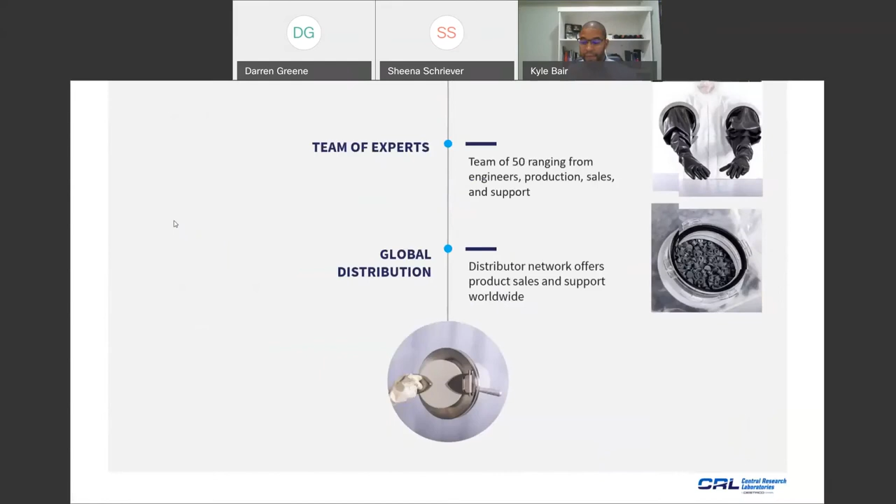Today, more than ever, compounds and therapies are being developed in aseptic environments, and this trend doesn't appear to be slowing down anytime soon. As a result, a lot of people are stepping up to support aseptic processing. Regulatory entities and guidelines like EMA, FDA, USP, and Annex 1, just to name a few, have already or will be revising recommendations to help provide more clarity around how to best manufacture sterile medicinal products.

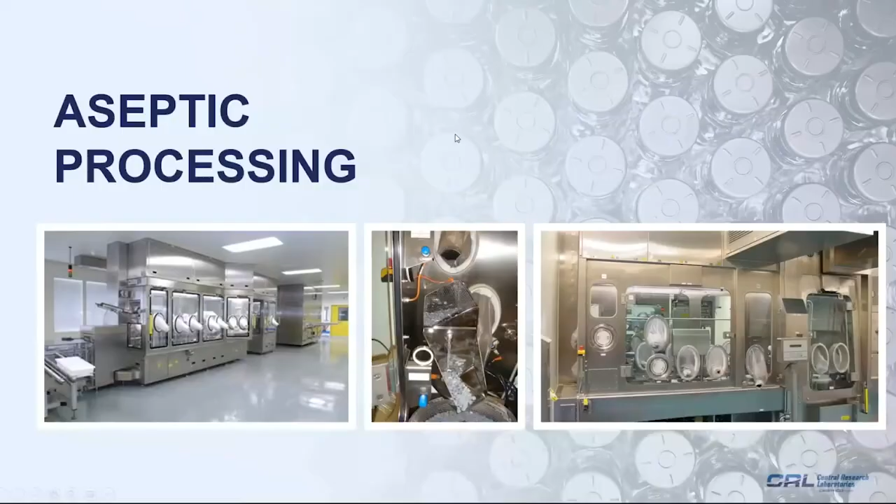Containment system manufacturers are creating units and systems that are far more advanced than ever. Several other manufacturers and engineering companies have developed or improved upon cutting-edge technology for the aseptic suite too. One of those technologies is rapid transfer ports, also known as RTPs.

RTPs have been used for years in the nuclear and life sciences industries and are used in conjunction with containment systems like isolators, RABS, or hot cells. While they've evolved over the years, at its core, RTPs still consist of two key components.

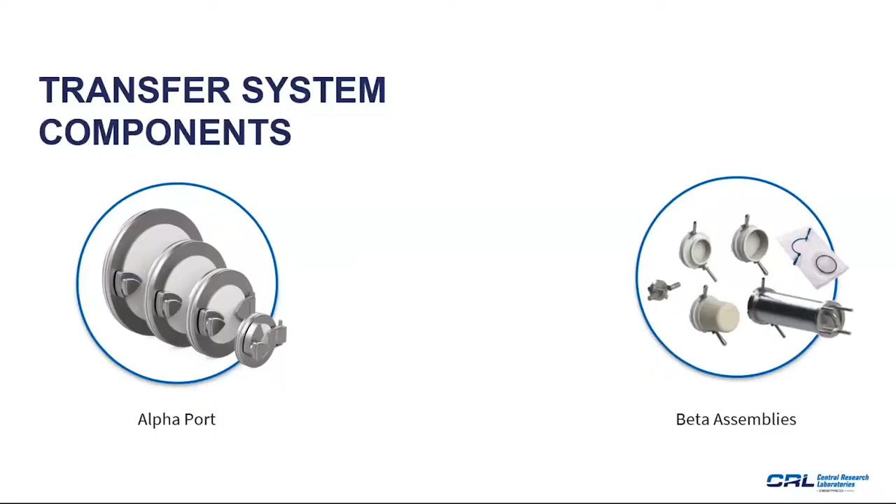An alpha port that's installed on the isolator wall, and a beta assembly, which is mobile and ultimately carries the desired items into and out of the isolator. The beta assembly mates and docks to the alpha port. At this point, the beta assembly essentially becomes an extension of the isolator so that containment is not breached when the alpha doors open. Companies like Sartorius, Getinge, ATEC, and CRL, just to name a few, manufacture these types of ports.

As with anything, RTPs have strengths and weaknesses. Let's examine some of these before we dive into their different configurations and applications.

The sizes, materials, and configurations of RTPs provide significant versatility. Alpha ports are typically composed of stainless steel and/or polypropylene, making them simple to clean. The double door and interlock design make it possible for containment to be maintained when the alpha port is and is not in use. And the complete engineered alpha and beta system allows for a fast and repeatable transfer process.

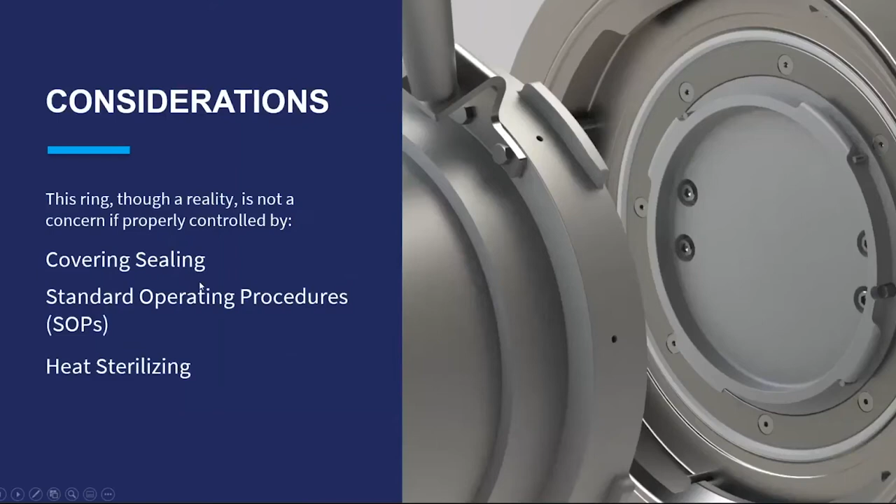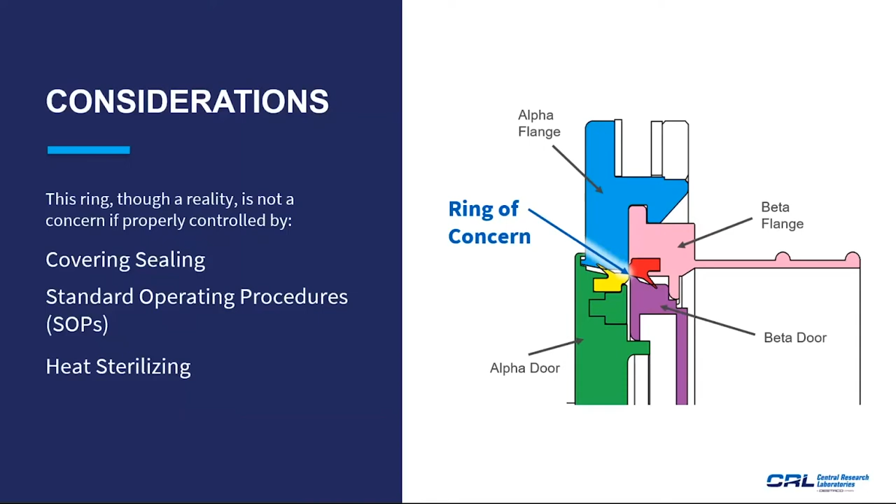While appropriate attention should be brought to this area, it does not need to be a concern if properly controlled. The area of concern can be addressed by any number of ways outlined here: covering the sealing surfaces with contained transfer funnels or sleeves, the use of proper standard operating procedures involving periodic cleaning, or heat sterilizing the sealing surfaces for sterile transfer with specifically designed alpha ports. More to come on this later in the discussion.

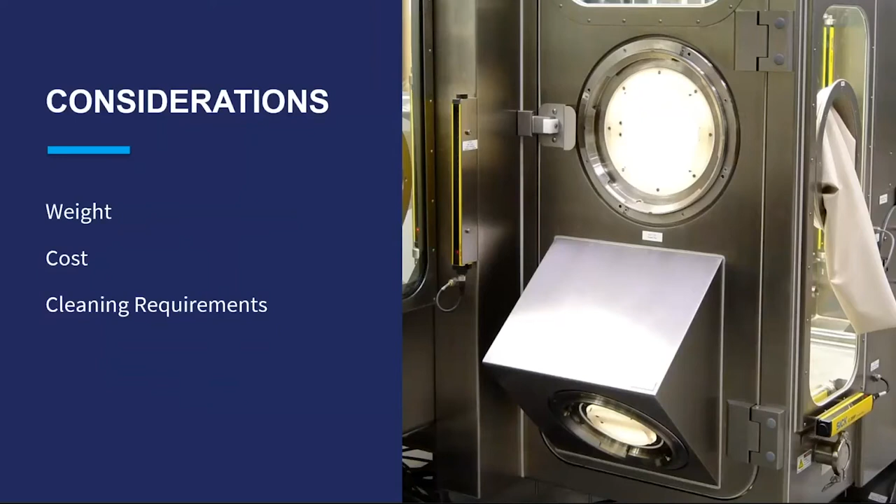Another consideration to keep in mind regarding RTPs is that larger beta assemblies can be heavy. In this situation, you may want to consider ways to support your beta assembly to assist the operator. And lastly, prices and cleaning requirements will differ based upon the materials and applications.

Now let's move a little deeper into the designs and applications of RTPs. First, we'll start with the alpha port. These ports come in various configurations depending on the application and the manufacturer. In general, you can find early generation RTP alpha ports like the one displayed on this slide.

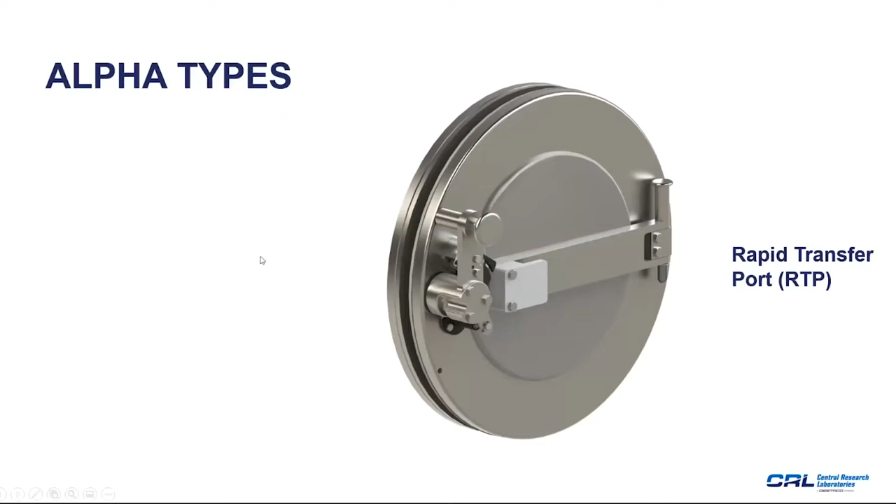These RTPs have evolved into newer versions, like this Clean Rapid Transfer Port by CRL. The CRTP, or Clean Rapid Transfer Port, has smooth surfaces, making them easy to clean and gentle on gloves. The handle also requires minimal rotation to break the seal of the beta component.

As briefly mentioned earlier, CRL RTPs and some other manufacturers feature mechanical interlocks that prevent improper operation of the transfer port, which can compromise the containment and sterility of the barrier system or isolator. The interlocks are incorporated into the alpha flange and interface with the alpha port door handle to prevent the door from being opened when a beta assembly has not been docked. The interlocks also keep the beta assembly from being removed from the alpha port when the alpha port door is open.

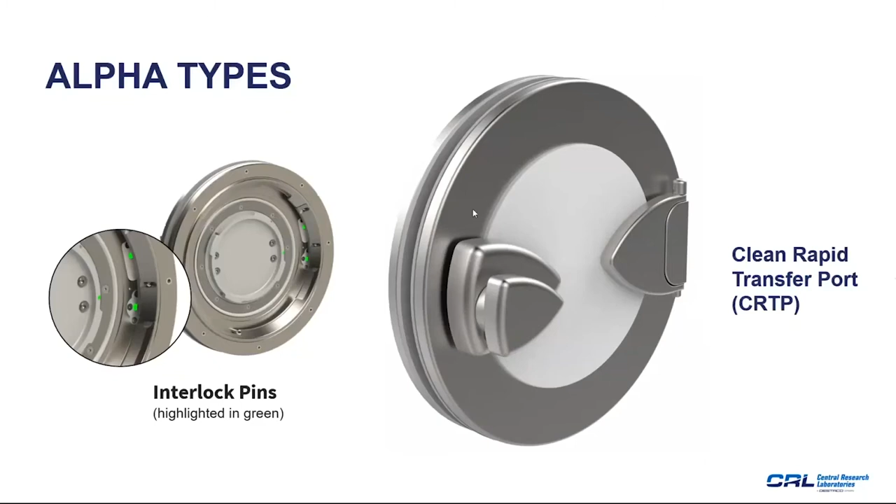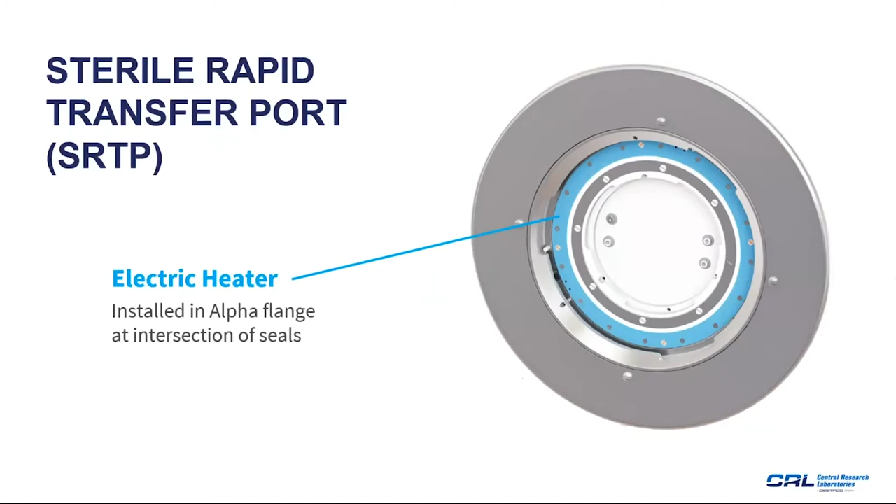The sterile rapid transfer port, or SRTP by CRL, is another version of an RTP specifically designed to transfer materials like stoppers or vials into an aseptic containment system. The SRTP has many features discussed earlier, like mechanical interlocks, but also utilizes an electric heater in the alpha flange at the intersection of the seals. This area is heated to 190 degrees Celsius and held for a predetermined time after the alpha and beta are docked. Independent tests have shown a 6-log microbial reduction when the heat cycle is used.

RTPs come in several sizes. The standard sizes you'll typically find are 105, 190, 270, and 350 millimeters. The 190 size is the most widely used and offers a good amount of flexibility in terms of the material or items being transferred. 105 is more commonly used for fluid transfers, while 270 and 350 are used more often to move larger items like tools, waste, or equipment.

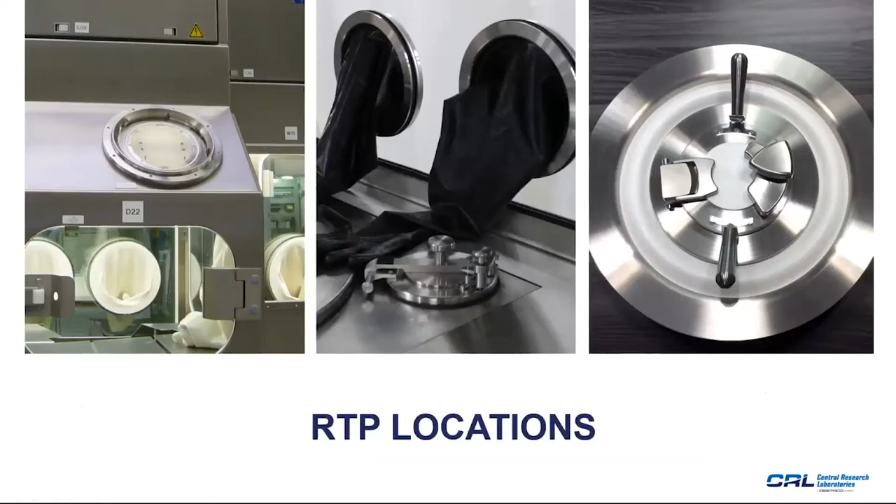RTPs can go just about anywhere you want on your containment system. Think about your operator, the items being transferred, where the items need to get inside of the isolator, proximity to glove ports, and the space around your isolator. CRL and some other manufacturers also make RTP flexible mounts for situations where connection alignment is difficult. These make it possible for the alpha flange to rotate to ease the docking process, pictured on the slide on the right-hand side.

If you already have a containment system that doesn't have RTPs, or it has one but you prefer a different location or a different type, don't worry, you're not stuck. CRL can work with you to add an RTP or modify your existing RTP.

So we've covered half of the RTP equation. Now let's move a little further along the Greek alphabet and explore the beta components. You name the process or application, and there's probably a beta assembly for it. And if there isn't, someone will build it.

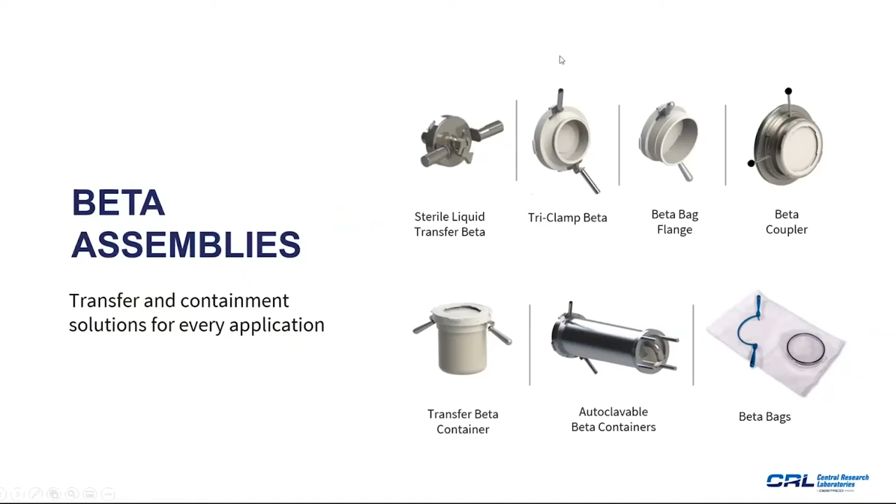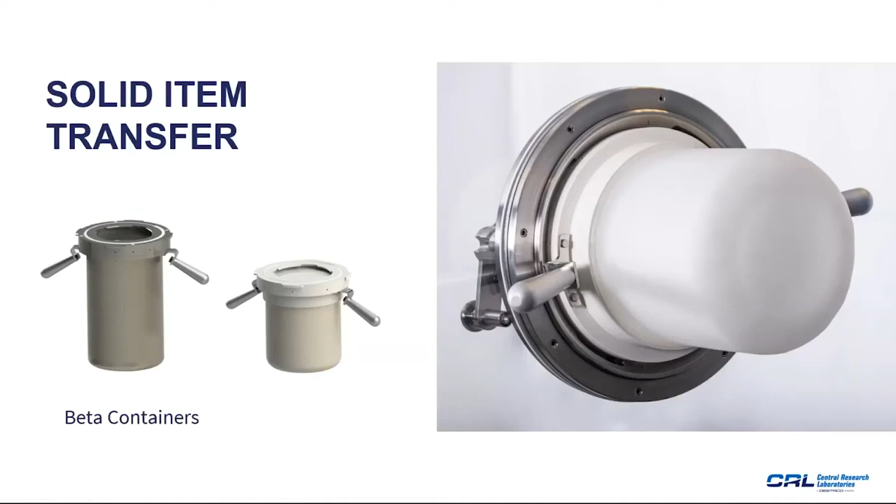Let's start with one of the more commonly used beta assemblies, those used for solid item transfers. These feature a gas-tight design and are available in all the diameter sizes mentioned earlier, 105 to 350 millimeters. Lengths run anywhere from 4 to 24 inches or 101 to 609 millimeters. CRL works with organizations on custom configurations, more on that in a little bit.

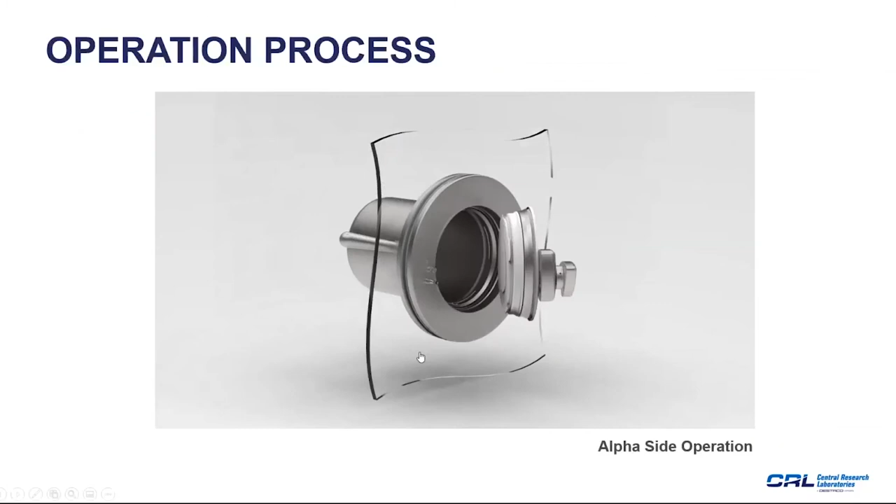This video shows how the beta canister docks to a CRTP. You can see how this process can help make transferring items like supplies, tools, or byproducts into or out of an isolator seamless.

Because component sterilization is such a common process in the aseptic suite, beta canisters have been developed specifically for autoclaving to make transferring even easier. These autoclavable beta canisters are designed for moist heat sterilization and are available in stainless steel and anodized aluminum.

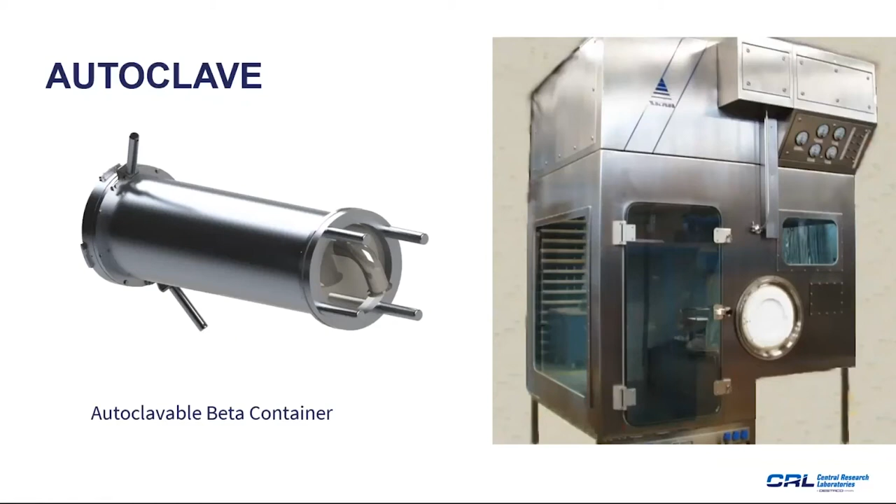Liquids can also be conveniently transferred with RTPs. CRL engineered a safe, aseptic, and cost-efficient method to do just that. The solution moves liquid from bulk tanks into isolation. The sterile liquid transfer port, or SLTP, uses three components to perform this transfer: an SLTP beta flange with steam connections, a steam-in-place docking plate, and a CRTP alpha with liquid transfer door.

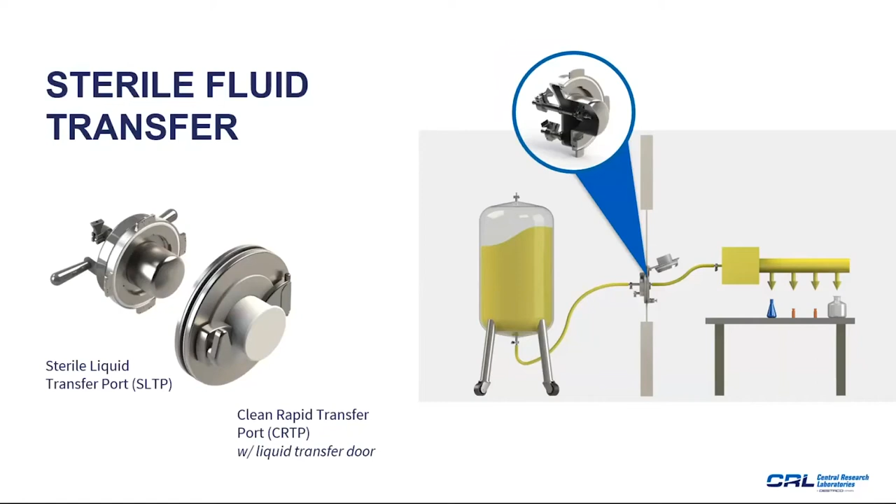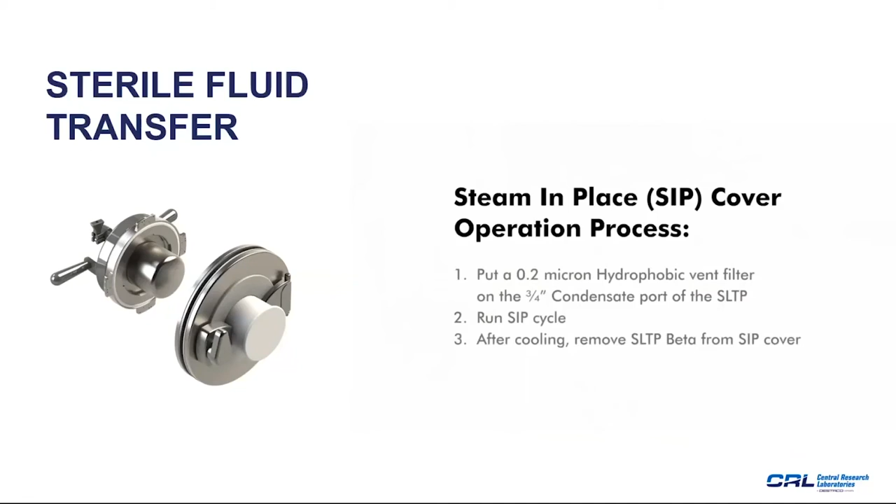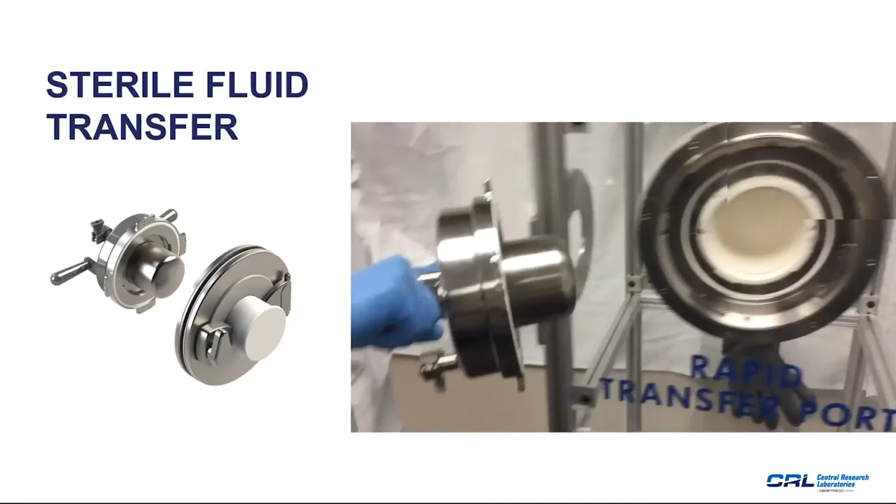This video shows what the process looks like. The SLTP beta flange with steam connections is docked to the steam-in-place docking plate for sterilization. Tubing and components needed inside of the isolator can be sterilized in an autoclavable beta container and transferred into the isolator. Next, the SLTP beta flange is ready to be docked to the CRTP alpha with liquid transfer door, as seen here.

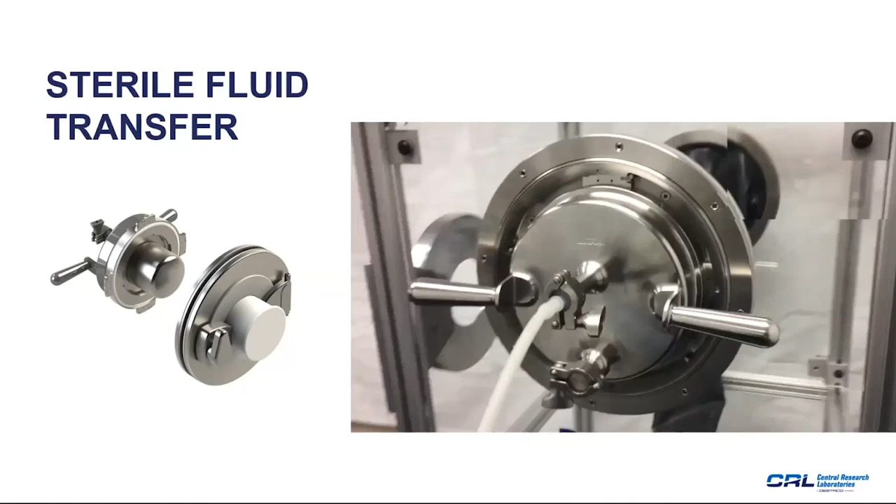Now, isolator side connections can be made and filling can begin. Once filling is complete, isolator side connections can be disconnected and the beta assembly can be undocked.

So there are several ways of bringing liquid into containment. This is a great way of doing it while utilizing an RTP port.

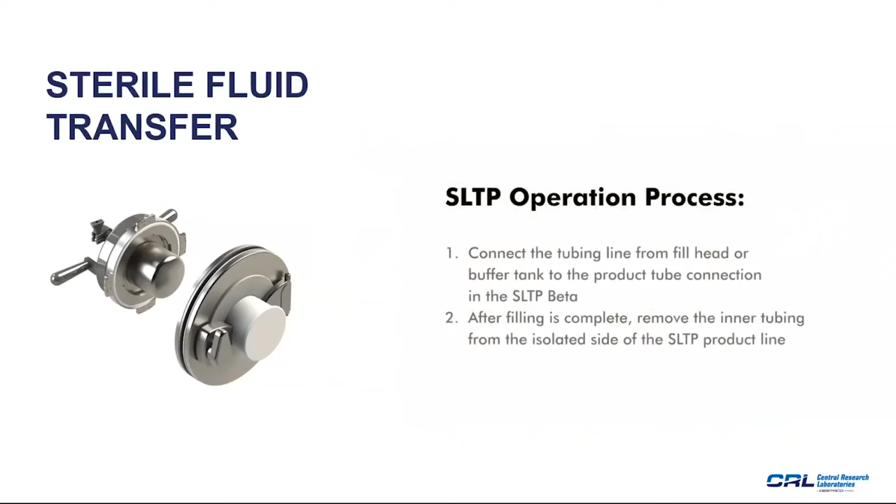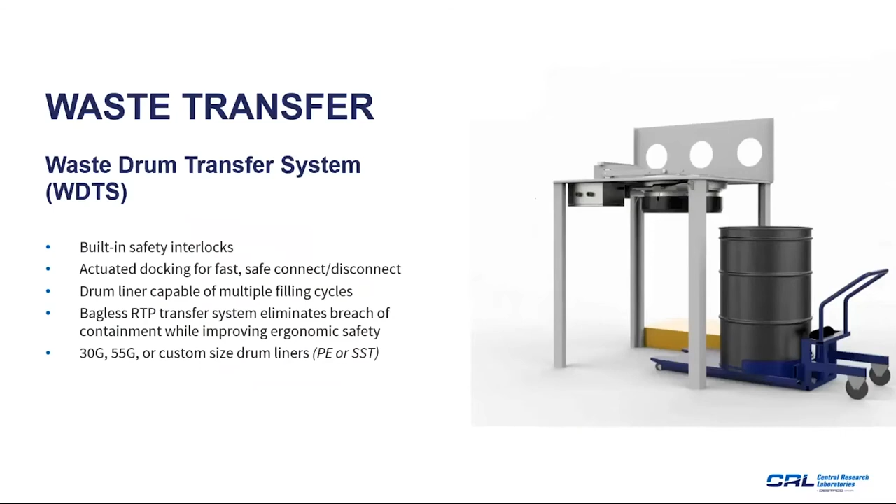This type of system may not be applicable to the type of work happening at your facility, but it demonstrates the full extent of how RTP technology can be adapted for different needs.

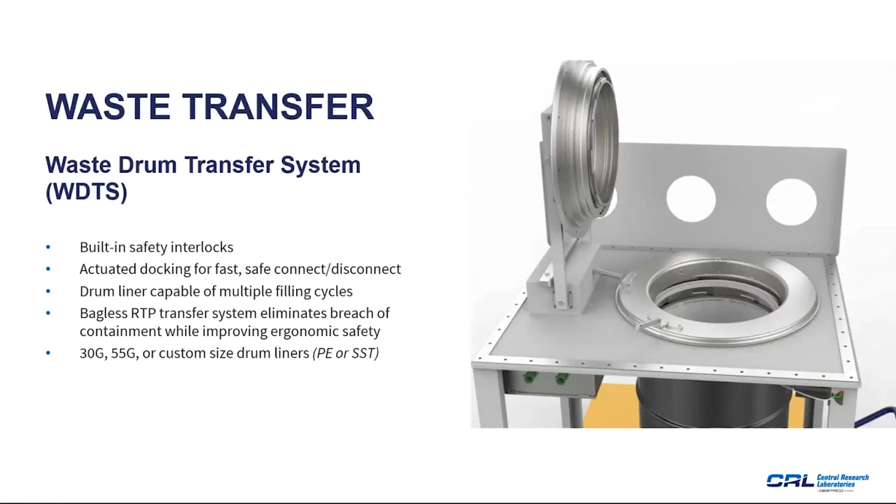There will likely be situations where a standard RTP assembly just won't cut it for your application. Fortunately, customization is usually an option, and CRL is no stranger to that.

Maybe you no longer need that large alpha port that's on your isolator. An alpha conversion could be the answer. An RTP can be converted to a different size without using up precious isolator real estate.

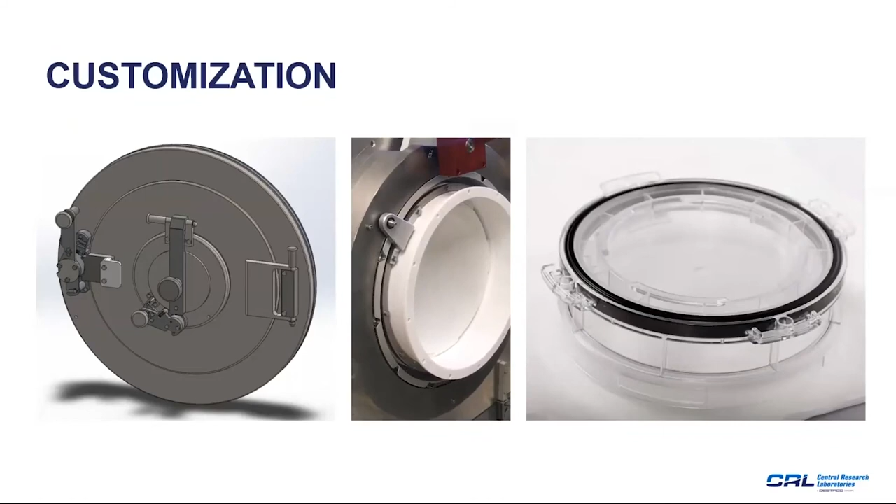So far, we've examined the reusable side of rapid transfer ports. Now let's pivot and look at how single-use technology can support your transfer needs. Some of the burdens of sturdy reusable containers become strengths for single-use options. Let's explore a couple of these.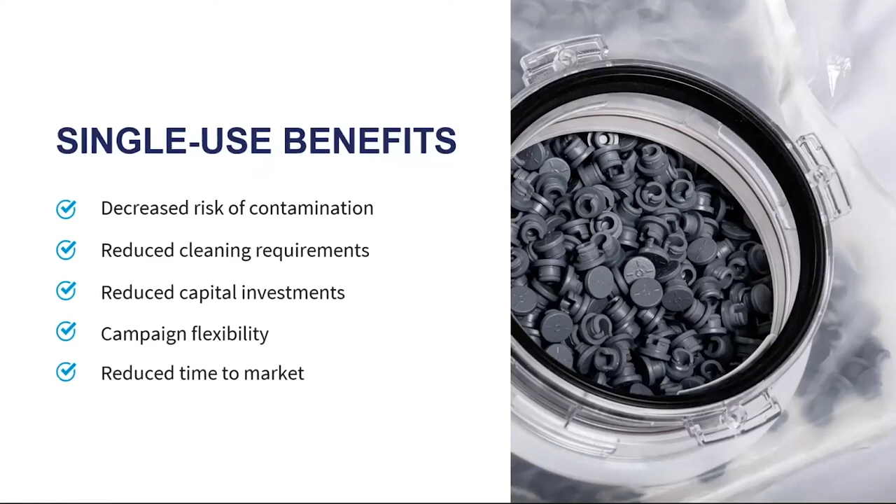Single-use beta bags can take the place of beta canisters. They're available in many sizes and are typically composed of plastics and/or breathable materials to improve autoclaving. This beta bag by CRL features Tyvek and high-density polyethylene.

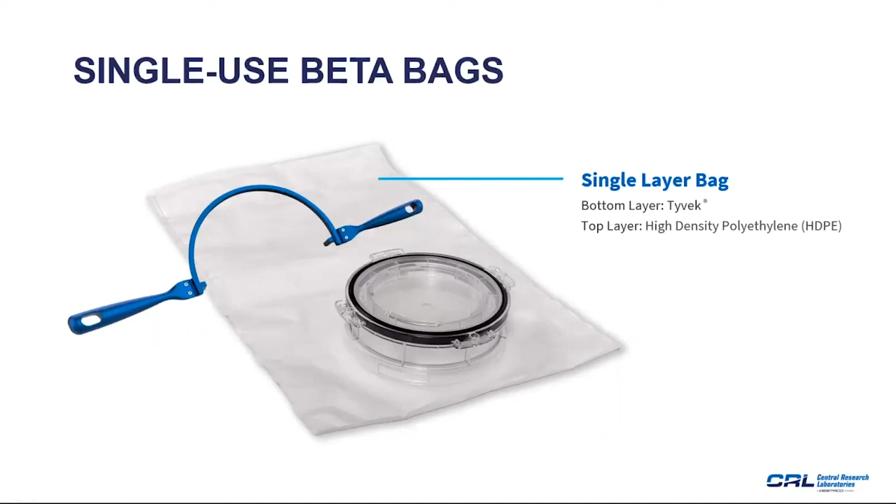I'm also excited to share that the engineering team behind this beta bag decided to expand the capability of the flange. One bag type features a flange that docks to CRL ports. A second bag type docks to alpha ports for other manufacturers. This versatility allows customers more flexibility in how and where they'll use the bags.

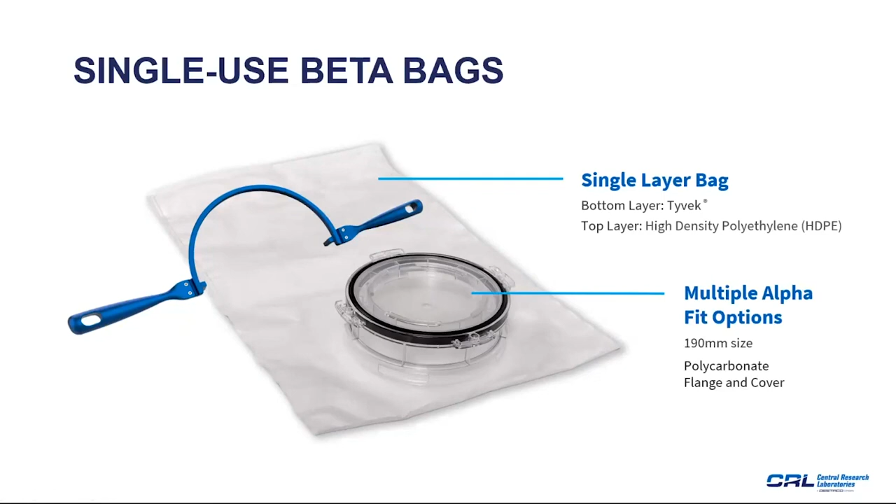Bags like this make it possible to transfer items like stoppers, vials, tools, products, and others into containment. Or you can transfer byproducts, yields, or waste out of containment.

Using single-use beta bags also allows you to take advantage of additional services that can increase efficiency. Pre-sterilization can take some work off of your plate. Here, distributors and suppliers have the capability to sterilize the beta bags and ship them directly to accounts, so they're ready to use. Kitting can make life around an isolator a lot easier too.

Kitting is a service that takes pre-sterilization to the next level. With kitting, the beta bags are filled per your request, then sterilized and shipped to the account. Now the bags are ready to be docked so that the requested items can be transferred into the isolator.

Common items requested for kitting are stoppers, cleaning products, or labeling supplies. It's really ultimately dependent upon what you want. It's a service that essentially allows accounts to request sterile and transfer-ready items.

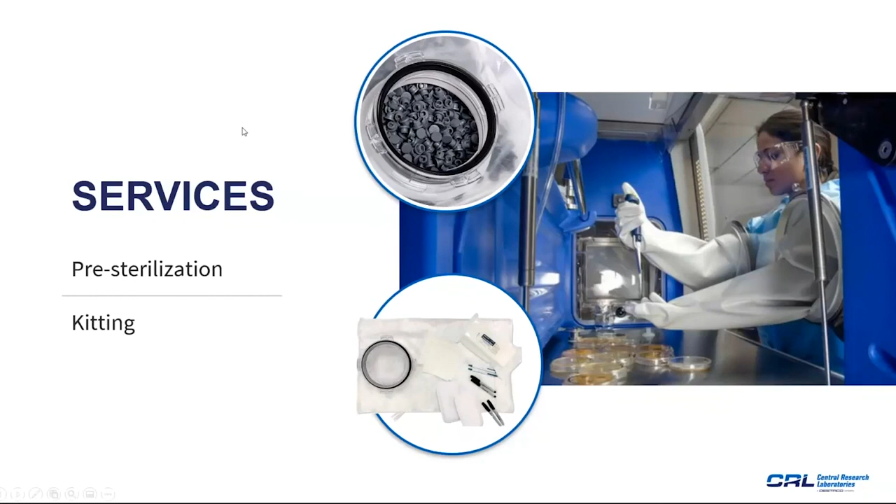Single-use tubing and connectors can be used in conjunction with reusable systems like the SLTP system that we looked at earlier. In these situations, they move fluid from bulk tanks into the isolator.

They're also being built into beta bags to form fully disposable liquid transfer systems. One bag can house the tubes and connections required for inside the isolator, as well as the lines that will connect outside the isolator. This type of configuration allows for a lot of customization based on application needs.

So before we move forward, let's summarize a couple key points that we discussed here today. We started this discussion with how aseptic processing is growing and being supported by isolator technology.

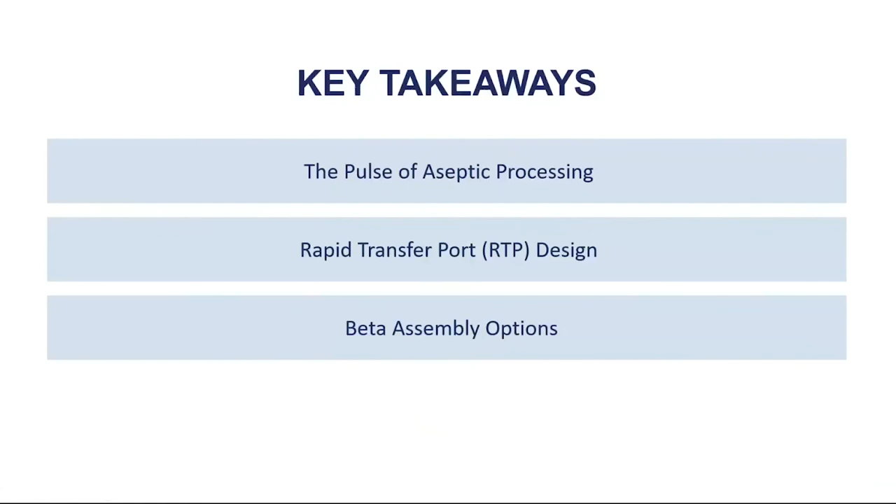RTPs have become an excellent means of transferring into and out of your isolator. We examined the design and beta assembly options associated with RTPs. And we rounded things out with how single-use technology is being integrated into RTPs. I hope that you're able to walk away with a greater appreciation for all the ways that RTPs can support your work.